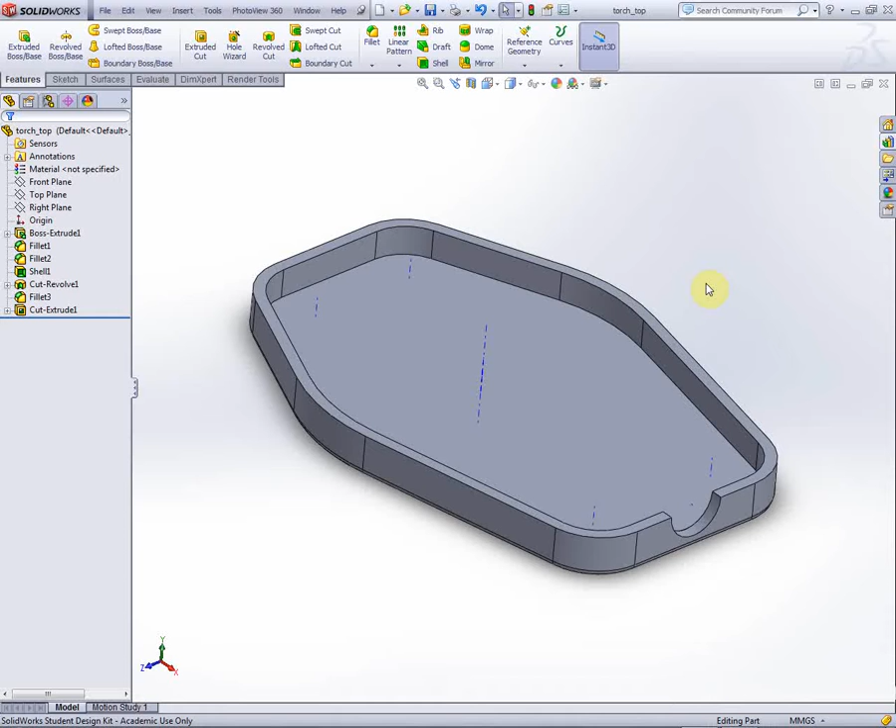Need to select this face and sketch. You can press Ctrl and 8. We need to do 2 circles. So from the center point, we need 1 circle here and another circle from the same point.

Right, we'll dimension those. Do the outer one first. I'll do that as 24.35, very specific, and the inner one as 22.35.

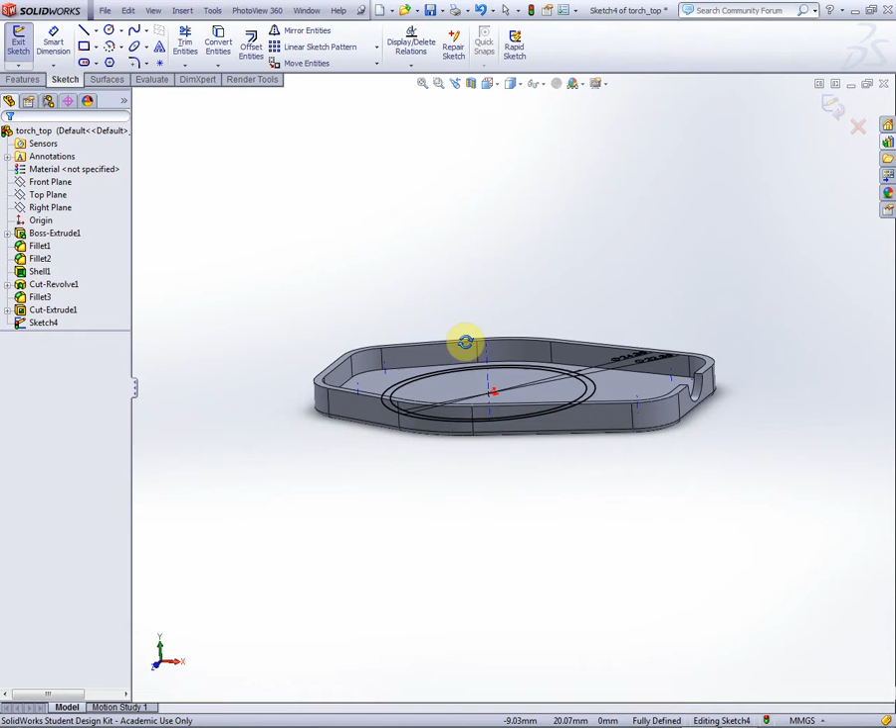Right, if you scroll out again, press the middle mouse button and rotate, we're going to extrude that sketch by 3 millimeters. Right, we need to cut some of this away. We're going to do that in 2 different steps. We could select a sketch and cut all 3 pieces away that we want, but what we're going to do is cut 1 piece away and then pattern that cut around.

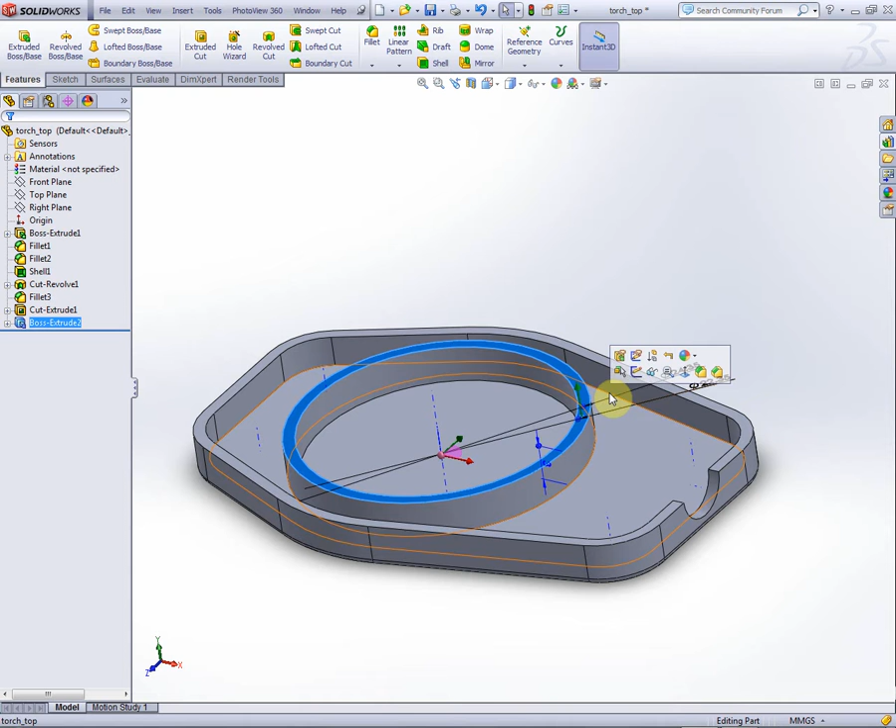So if we take the top surface here and sketch, press Ctrl and 8 as usual to turn it round. Right, we can start with 2 centre lines. The first one from the middle, vertically up. Right click, end chain. We need another one going off at an angle. Press escape to finish. Right, if we dimension those by clicking on both lines, we need to dimension that at 60 degrees. So there's the 60-degree angle between those 2 lines.

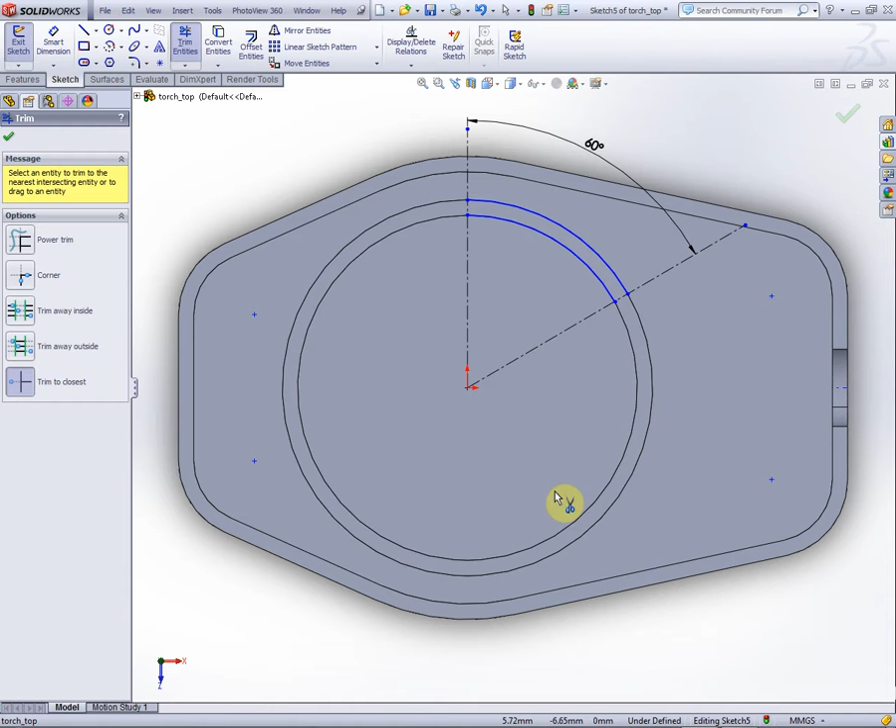I'm then going to select the circle again and go up to those, let it snap onto those 2 circles we've already just done. Press tick, trim these bits here, the bits outside the 2 centre lines we just drew, so we're going to end up with these 2 arcs here. If I scroll in, what I need to do now is get a line tool and finish off that shape there and to the right there. That means we've now drawn a shape just here.

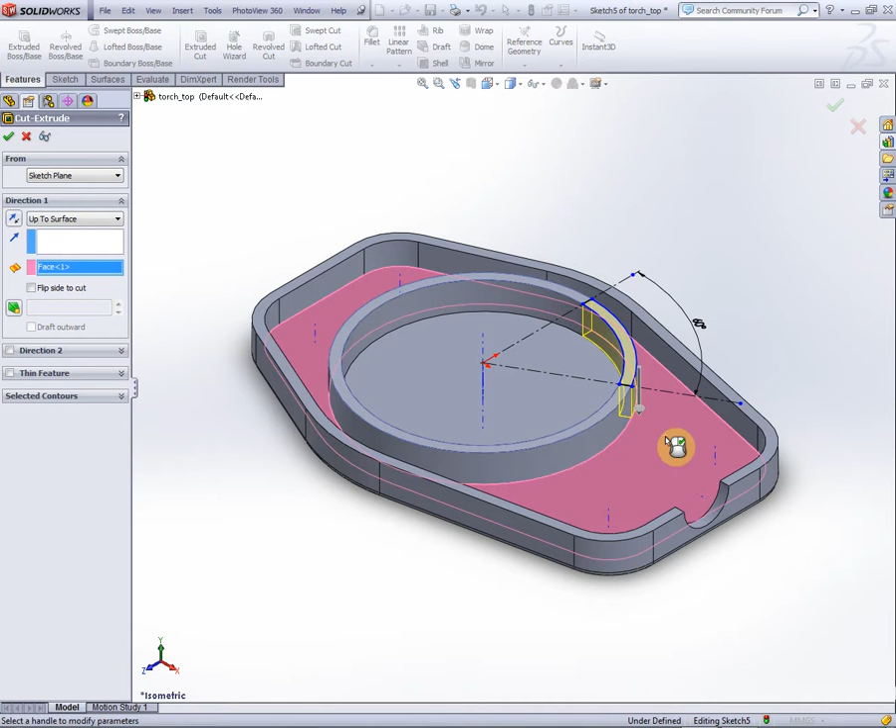If I scroll out again, if we can press Ctrl and number 7, I'm now going to use that sketch to cut down. So features, extrude cut. Instead of blind, we're going to go up to surface. I'm going to select this surface here. So if we tick that, you'll see it's now chopped that away just on that point there.

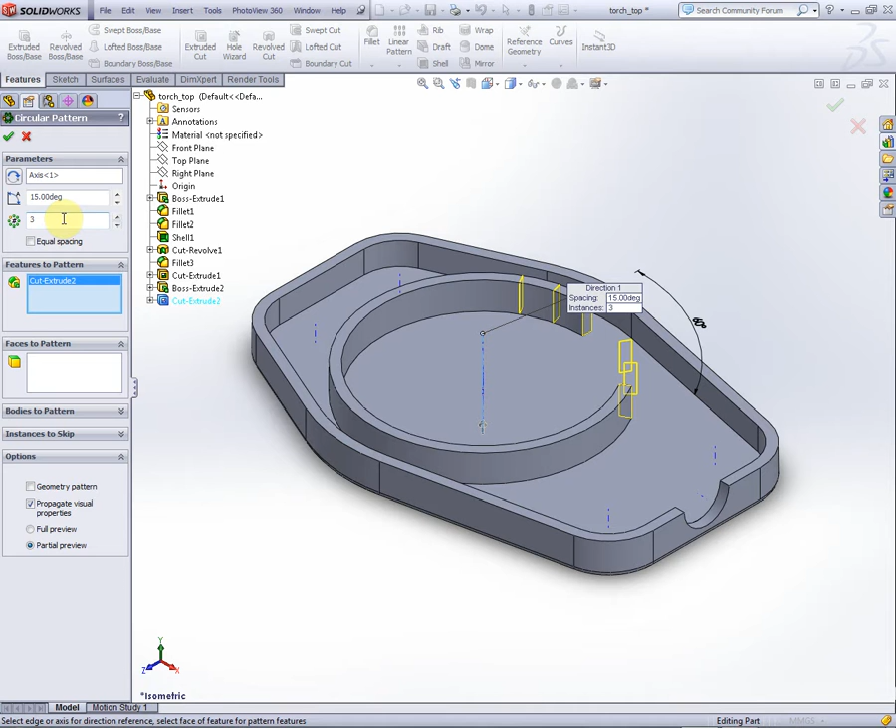Right, I'm going to click on circular pattern. The axis is going to be this temporary axis in the middle, and the features to pattern, if I press on here, we want the extruded cut. Now we want 3 different ones. We could do many. We want equal spacing, so it's going to equally space. We could do 2, 3, 4. We could do as many as we like. We do want the 3. If I tick now, that's there. So we've now got 3 cuts as we need. Save.

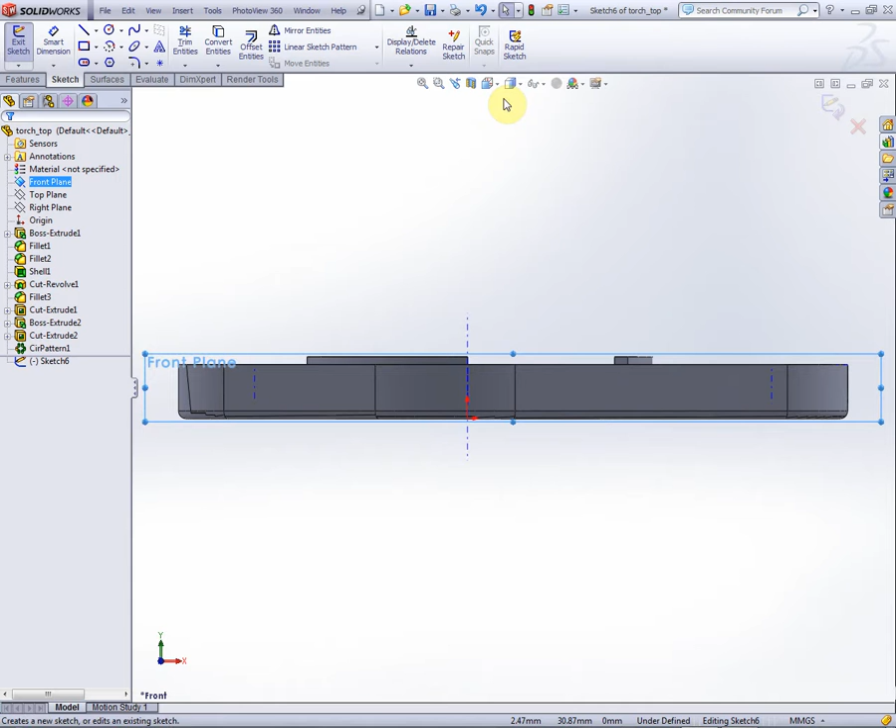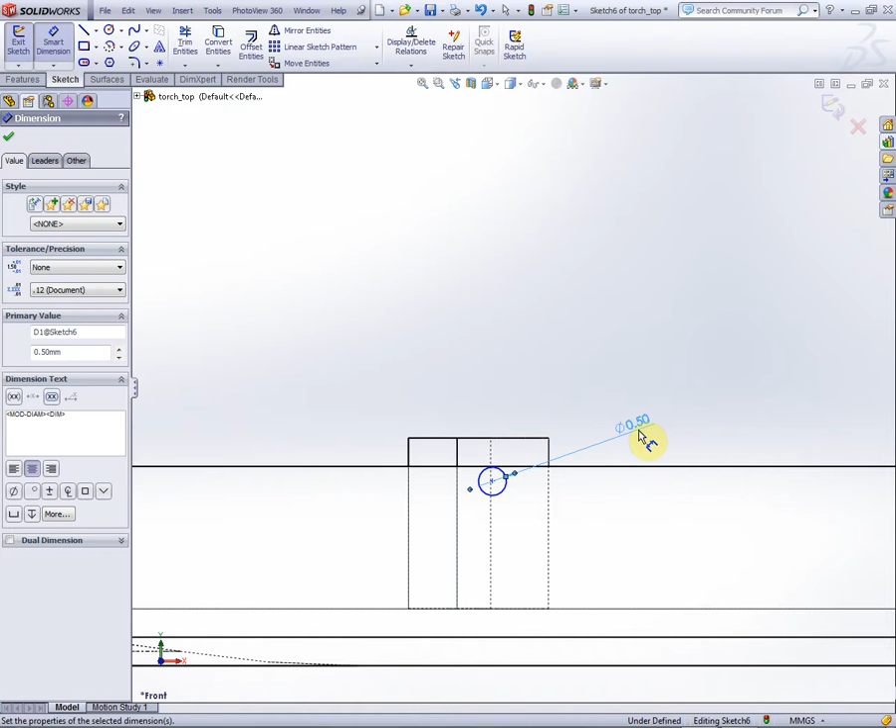Right, I'm going to go on to front plane and sketch. I need to go Control and number 8, and I now need to go and view the second one up, which shows hidden lines. I'm going to draw a circle, but I'm going to draw it on this edge here. The circle needs to be 0.5 of a millimetre in diameter, and it needs to be 1 millimetre below that edge.

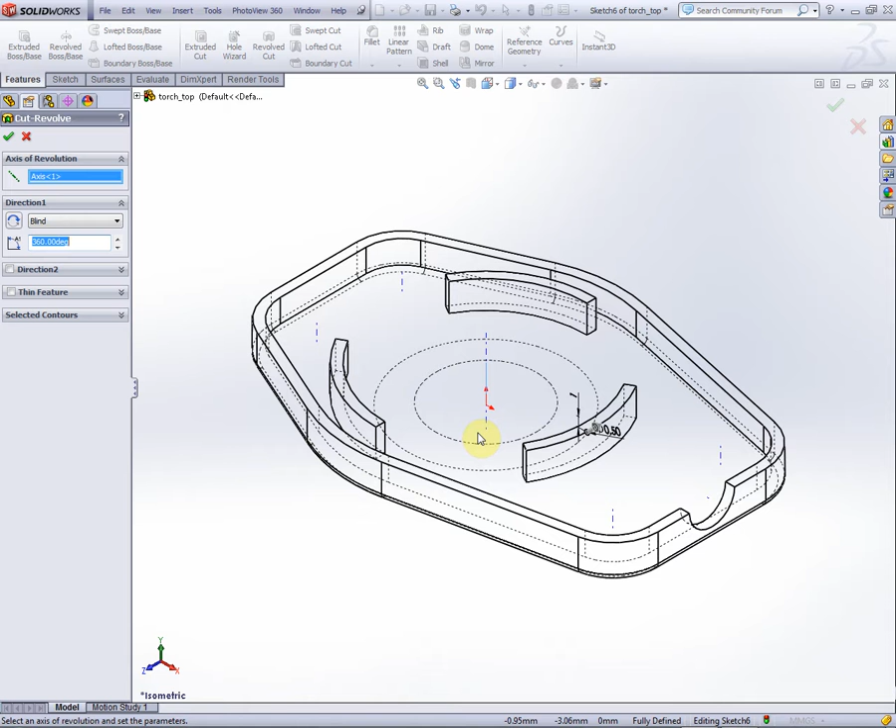Scroll out, press Ctrl 8. Press Ctrl 7, sorry. But what we're going to do with that circle there is we're going to revolve a cut. I'm going to use the axis of revolution as this, and we should be able to cut that now. We look at the normal view, it has cut a circular cut through these parts here. That's going to interact with the other part of the torch and help this snap together. Save where we've got to.

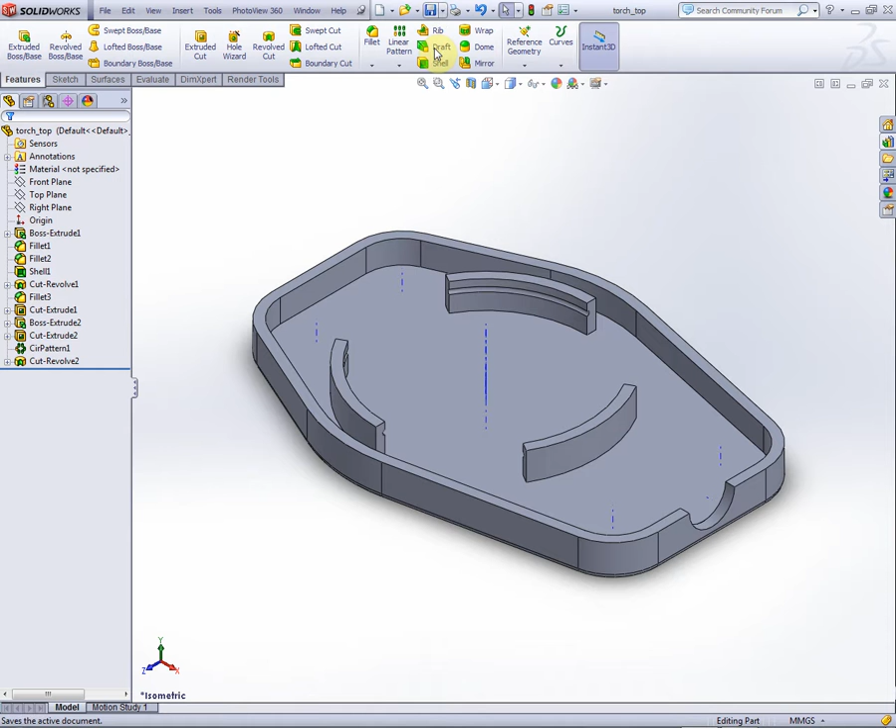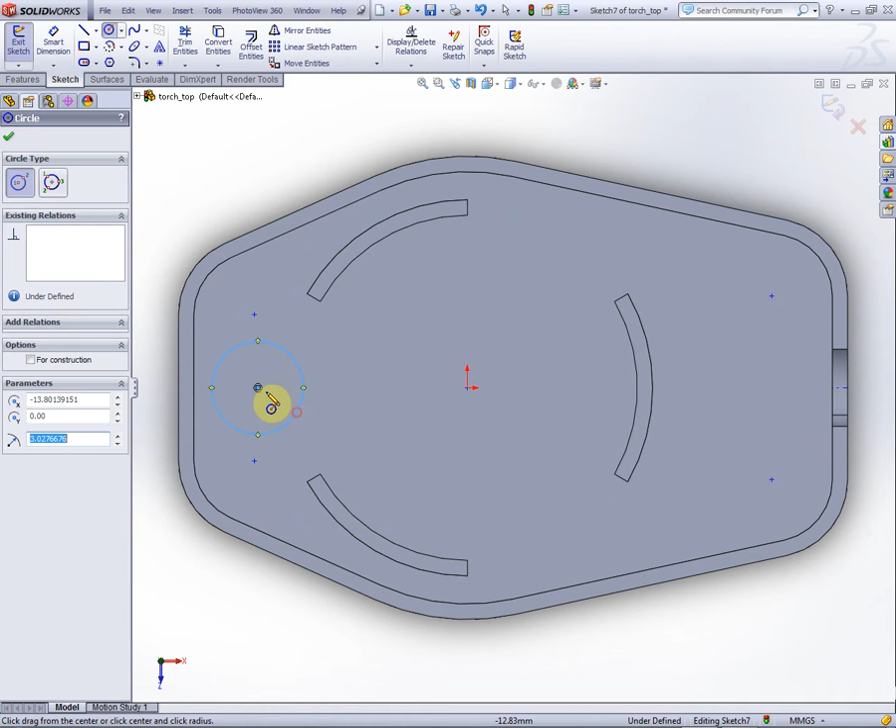Right, we need a new feature just here, which is to do with where you put your keyring through. So select this surface here, press sketch, Control and 8, 2 circles. We need it in line with that, so we don't click the mouse yet, but move the mouse in line with the center points here, click and then do the same again. The first thing I'm going to do is dimension the distance from the center point to the circle. I need that as 13.85.

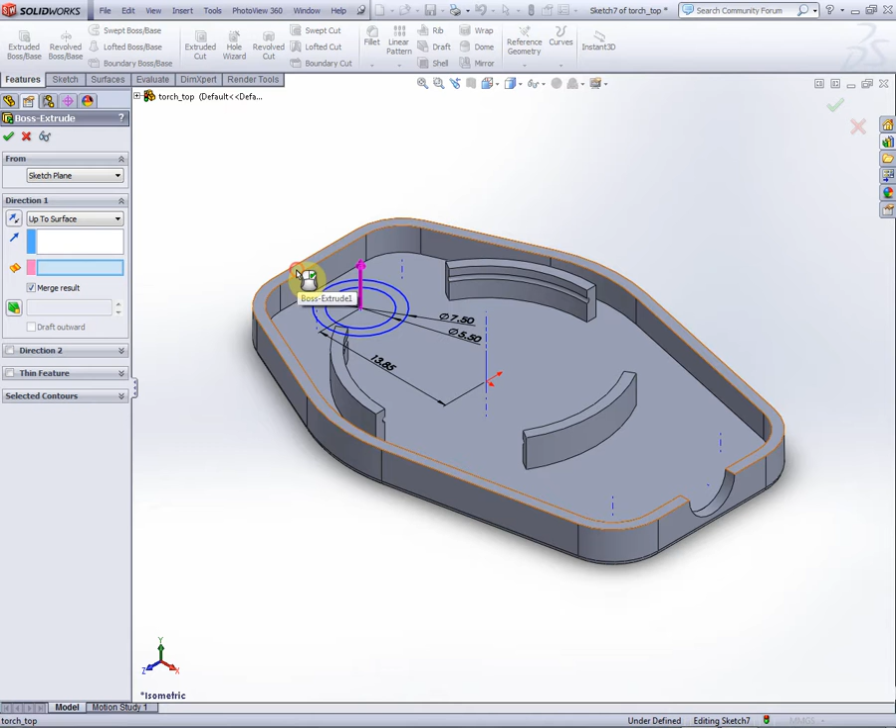The outer circle is going to be 7.5 and the inner circle is going to be 5.5. Press Ctrl 7. We need to extrude that, and again, instead of a dimension, we can do it up to surface. We need it to come up to the same level as this surface. So there we go.

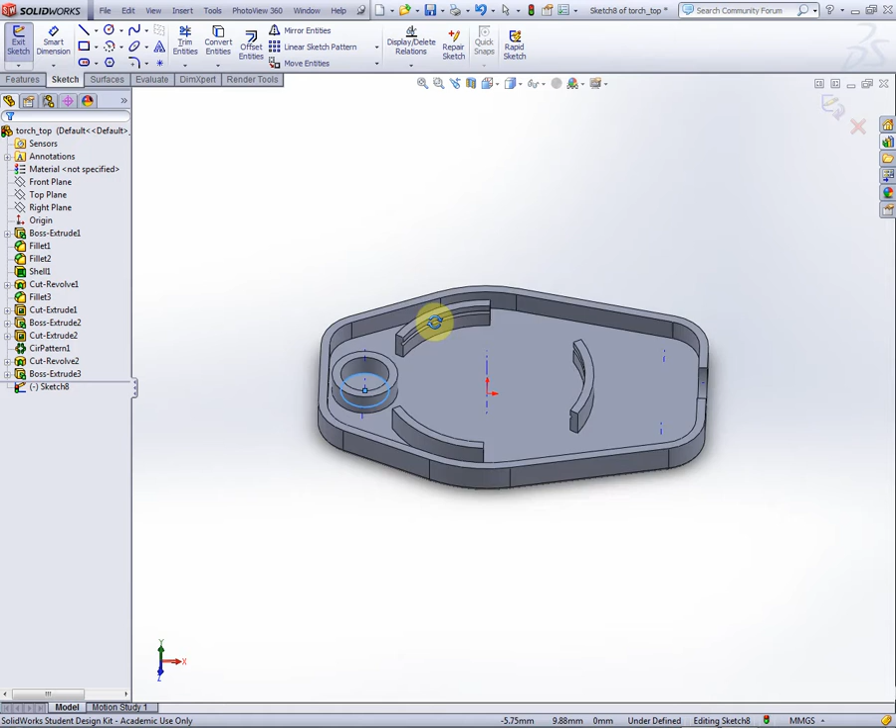Save. We need to cut out the centre of this circle. So if we select this surface, sketch, Ctrl 8, get the circle tool from the middle, snap to that edge, tick, middle mouse button and rotate. We then use that sketch to extrude a cut, and we can go through all. So that's that. I then need to put a 0.5 mm fillet on that edge here, 0.5. Right, we're nearly done.

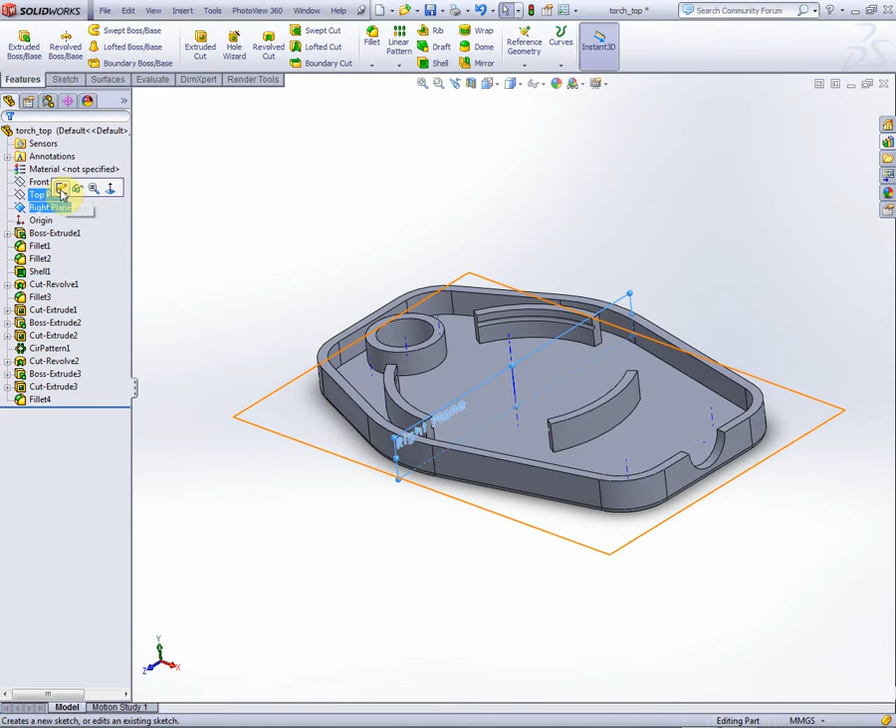I need to cut a hole out of here, so if I go to right plane and sketch, Control and 8. Right, we need this tool here. It is a center point straight slot. We need to click on the top point here if it will select. Doesn't seem to want to select today. There we go. Go up vertically and then out.

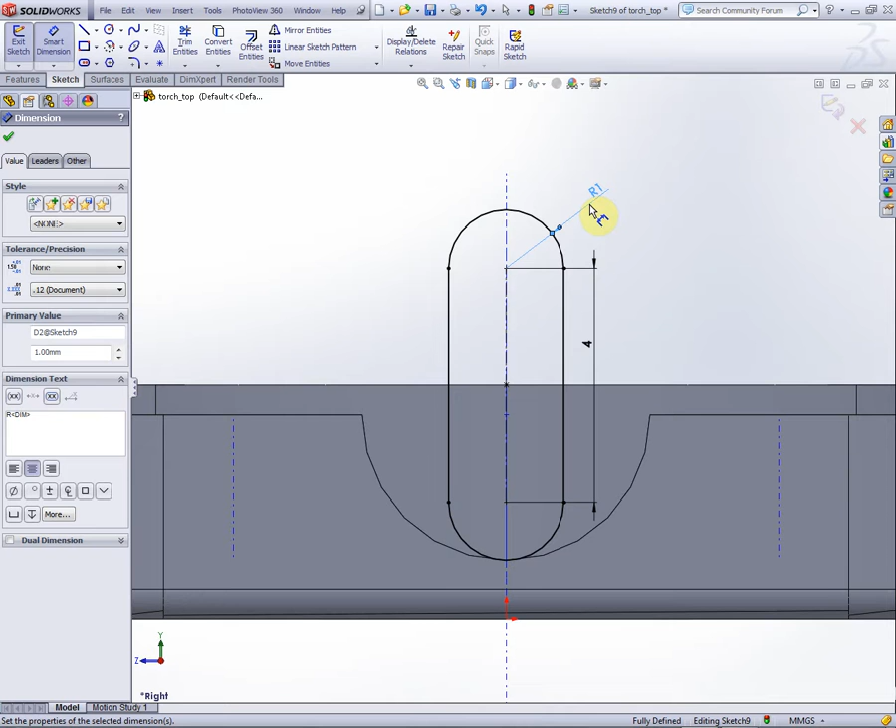We need to dimension this. The centre bit needs to be 4 mm and the circle needs to be 1 mm. Scroll out, Control 7. We're going to extrude cut. We want it coming this way, so we need to